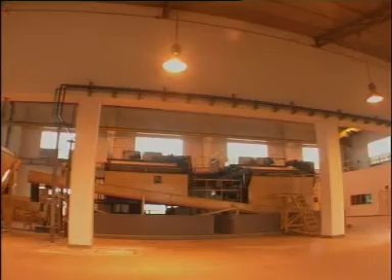The Thung Khru Water Environment Control Plant is one of the wastewater treatment plants under the supervision of the Department of Drainage and Sewerage, DDS BMA. The plant has been operated since February 2002. It is situated on Soi Pracha Utit 90, Thung Khru District.

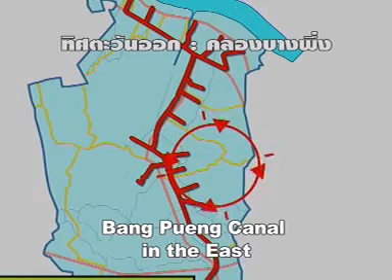The Thung Khru Water Environment Control Plant covers catchment areas of 42 square kilometers, serves 177,000 residents with total capacity of 65,000 cubic meters a day. The responsible area covers from Dao Kanong Canal in the north to Bang Chak Canal in the south, and from Bang Pueng Canal, Jang Rong Canal, Sapan Kwai Canal, and Hua Pai Canal in the east to Ratchapruk Canal and Rang Wek Canal in the west.

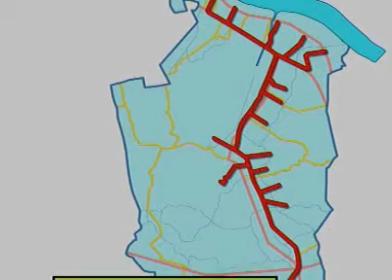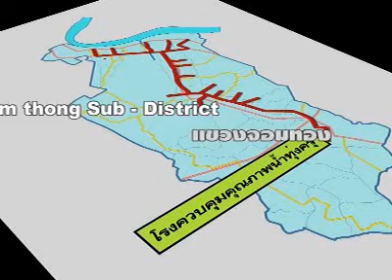The Thung Khru Water Environment Control Plant is responsible for wastewater treatment in the area of Thung Khru Sub-District and Bang Mot Sub-District within Thung Khru District, Ratchaburana Sub-District, and Bang Pakok Sub-District in Ratchaburana District, including some areas in Jom Thong District. Gathering wastewater from responsible areas into a wastewater treatment plant is a common method to start sewage treatment operation.

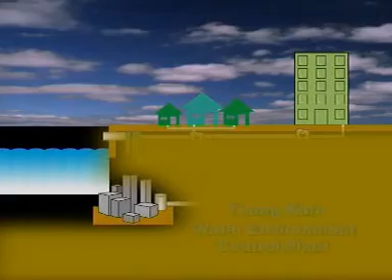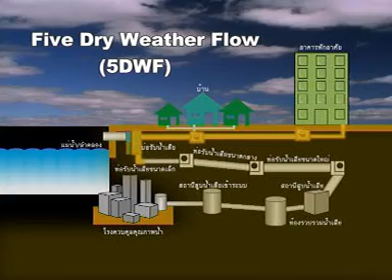The Thung Khru Water Environment Control Plant has provided standard treatment system, and has built a new interceptor chamber, or IC, which is capable of maximum storage at 5 dry weather flow of the overall wastewater in the area. Thus, the new interceptor chamber will not allow any wastewater to flow into public canals without any treatment. However, the interceptor chamber might not be able to handle extra water on rainy days, and the rainwater will overflow from the interceptor chamber into public canals.

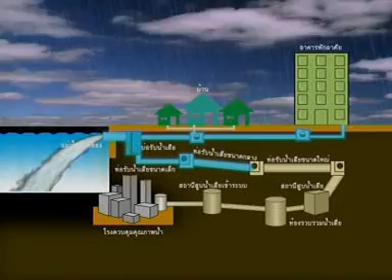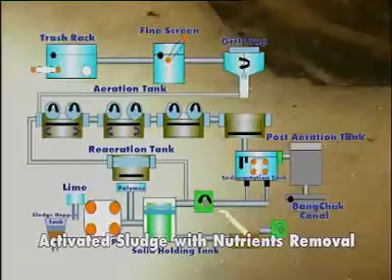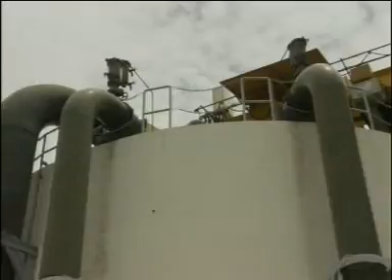When wastewater is passed through the drains to the Thung Khru Water Environment Control Plant, the wastewater will be treated by the method of activated sludge with nutrients removal with vertical loop reactor before discharging into Bang Chak Canal. The primary process focuses on physical treatment to separate trash and large solid materials such as wooden chips, plastic bags, pieces of cloth from the wastewater to protect the pump and other equipment in the treatment plant. Then the rest of the wastewater will pass through the grit trap to separate sand and gravel out of the wastewater.

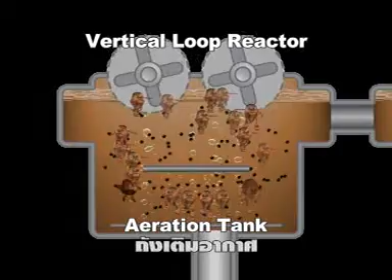The wastewater then will flow into the aeration tank, which grows a number of microorganism sludge to effectively digest organic materials in the wastewater. The aeration tank at the Thung Khru Water Environment Control Plant is a vertical loop reactor type, which can remove nitrogen too. After being treated in the aeration tank, a substance called ferric chloride will be added into the water in order to remove phosphorus before flowing into the sedimentation tank.

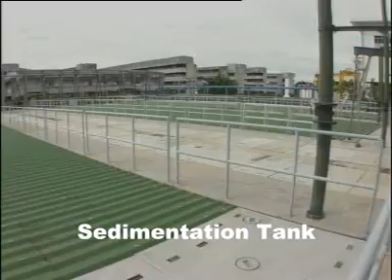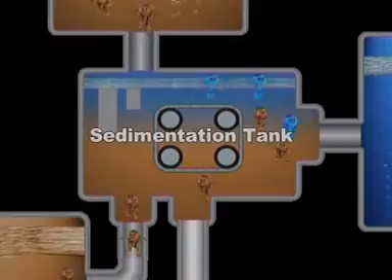It will allow suspended microorganisms to settle at the bottom as the rest of clear water will overflow into the post-aeration tank to increase the dissolved oxygen in the water prior to discharge into Bang Chak Canal. The sludge at the bottom of the sedimentation tank will then be divided into 2 parts. The first part is sludge which is reprocessed into the aeration tank.

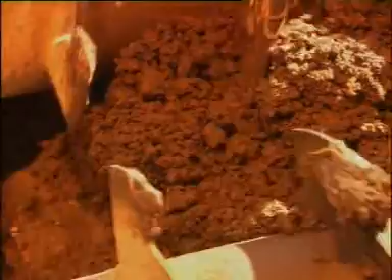Meanwhile, the second part will be carried into the solid holding tank, ready to be dried out by using a pressing machine mixed with polymer to remove the water. The dried sludge will then retain its concentration of at least 20%. After that, it will be carried into a dried sludge hopper tank added with slaked lime to prevent sludge cake from odors. The remainder will be sent to the aerobic digestion at Nong Khaem Water Environment Control Plant.

For several years, the Thung Khru Water Environment Control Plant has been established to provide efficient wastewater treatment service for Bangkok residents. However, the Bangkok Metropolitan Administration has been responsible for expenses of operating, developing human resources, training, and maintenance. These expenses are 100 million baht per annum when the operation of all BMA wastewater treatment plants is taken into account. On the other hand, it would be better if the Bangkok residents are able to share these expenses so that BMA can allocate the budget to develop other services.

Therefore, it is necessary for BMA to implement the wastewater treatment charge from members of the community with the reason that we are the ones who pollute the water, so we should take responsibility, or it is based on the universal concept of the polluter pays principle.